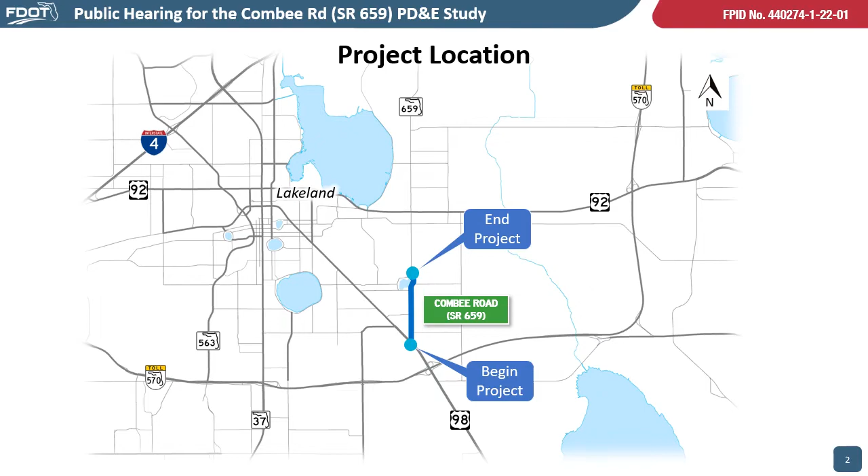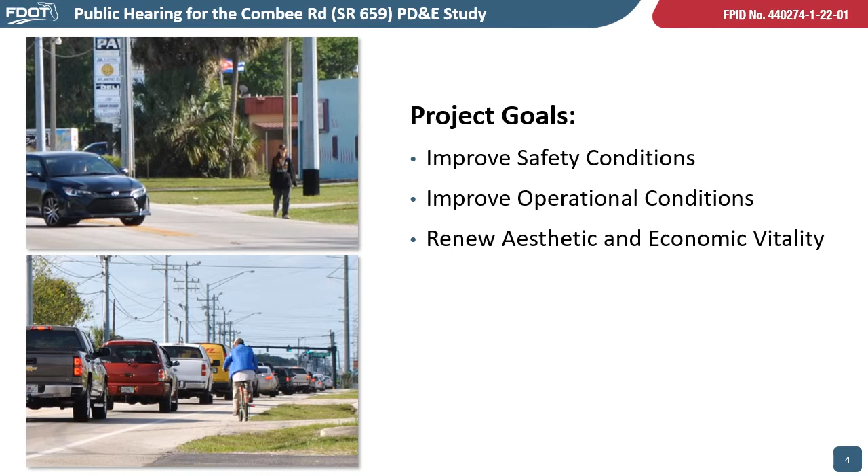The land use along Combee Road is a mix of suburban residential and suburban commercial. People have been observed walking and biking between the adjacent neighborhoods, the shops, and nearby schools. The project goals of this study are to improve safety and operational conditions, renew aesthetic and economic vitality, and enhance multimodal access along Combee Road for all users, including pedestrians, bicyclists, and transit riders.

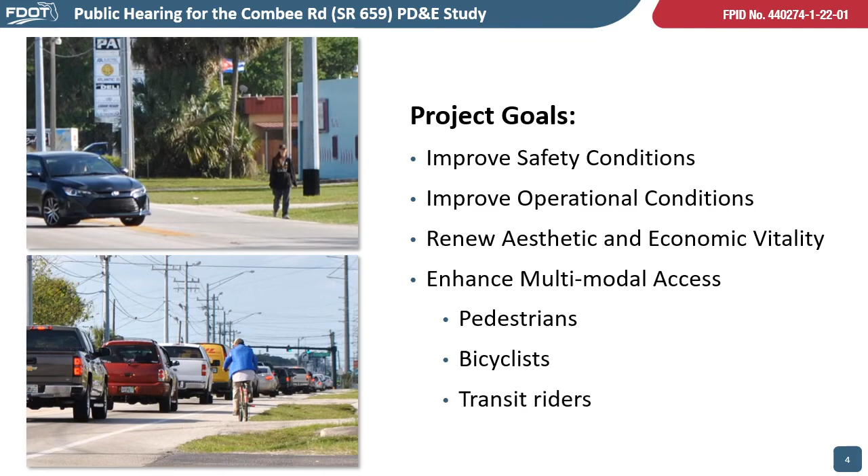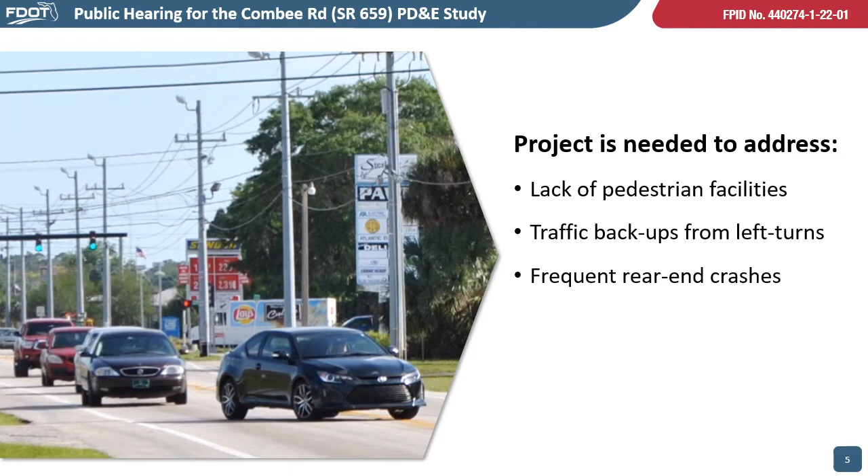The need for the proposed improvements for Combee Road is indicated by a lack of pedestrian facilities, frequent traffic backups as vehicles stop on the road to make a left turn, frequent rear-end crashes, and crashes at signalized intersections.

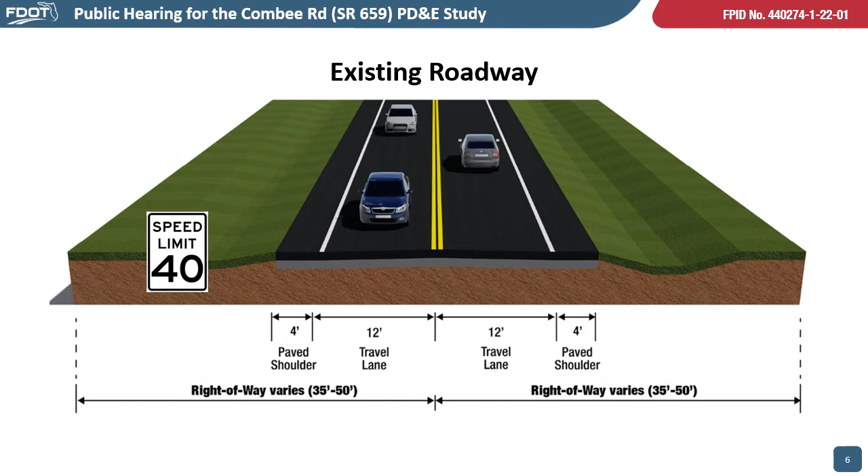Within the project limits, Combee Road is a two-lane road with one lane in each direction. There are paved shoulders but little to no sidewalks. The speed limit is 40 miles per hour. Stormwater runoff is collected in shallow roadside ditches.

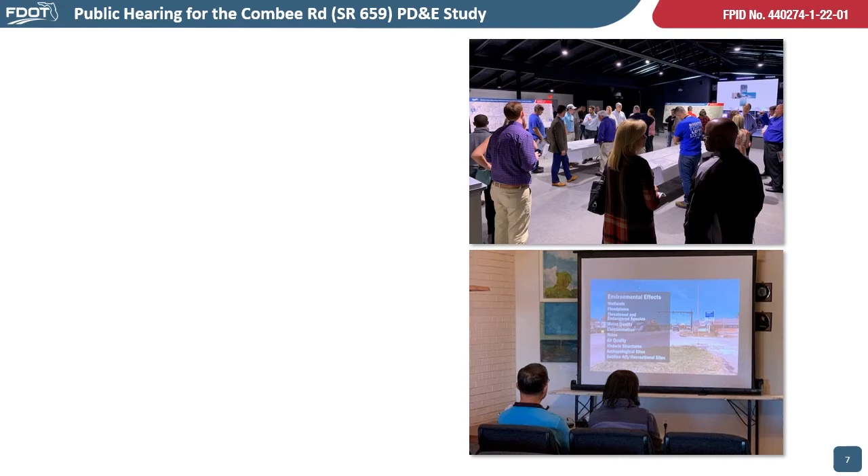Throughout this PD&E study process, FDOT has looked at many different concepts to enhance safety and multimodal access along Combee Road. In August 2018, FDOT conducted a public kickoff meeting. At the Alternatives public meeting on March 7, 2019, and the virtual public workshop from November 12, 2020 through December 3, 2020, we asked for your input on proposed improvements to Combee Road.

Based on your comments and additional environmental and engineering analysis, a preferred alternative was selected for Combee Road. The preferred alternative for Combee Road includes a 13-foot wide two-way left turn lane, one 12-foot wide travel lane in each direction, and an 8-foot wide sidewalk on both sides.

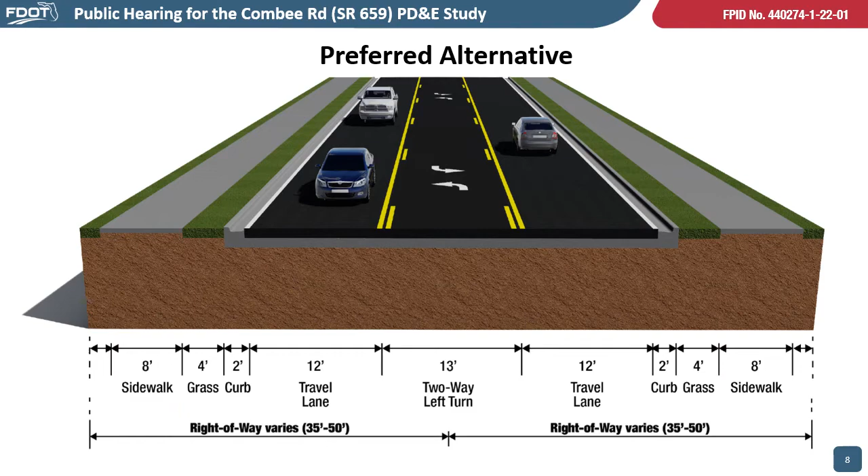Curb and gutter would be added to collect and redirect stormwater to off-site ponds for treatment. The preferred alternative includes single-lane roundabouts at Main Avenue and Skyview Drive.

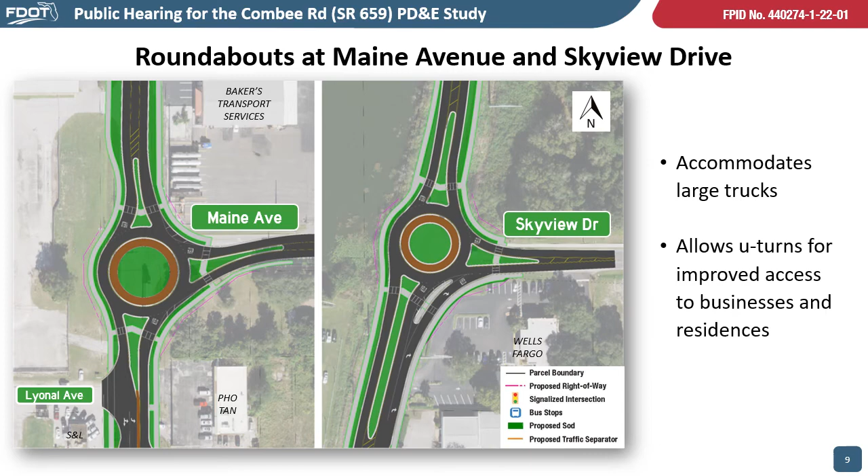Roundabouts have been shown to have safety and traffic benefits for all roadway users and can accommodate buses and large trucks. At these locations, the roundabouts are anticipated to have fewer crashes and would allow U-turns for better access to businesses and residences. At the remaining intersections of US 98, Commerce Point Drive, and South Crystal Lake Drive, traffic separators would be added to reduce crashes and improve safety.

Proposed locations are shown on the screen and on the display boards.

One intersection with a high number of crashes is Industrial Park Drive. A contributing factor to this issue is vehicles making a left turn out of Industrial Park Drive while unable to see approaching traffic. Multiple options were evaluated, including combining the signal at South Crystal Lake Drive with Industrial Park Drive. However, the analysis shows that this option would result in excessive traffic delays and safety issues.

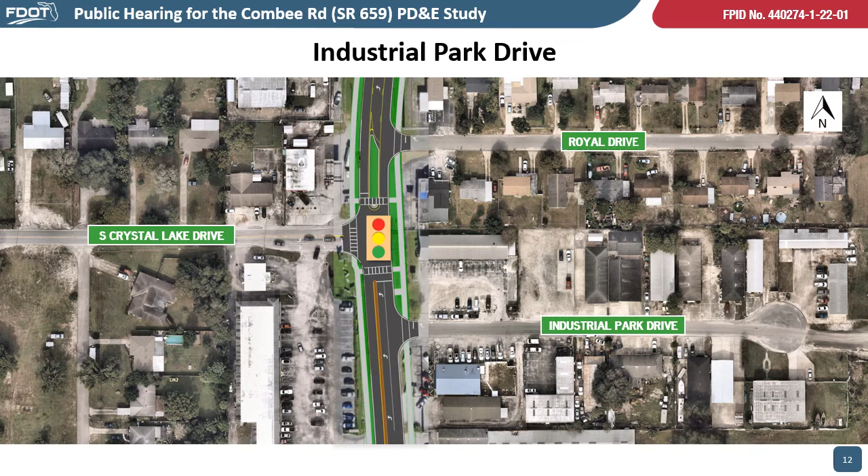To improve safety at this location, FDOT is proposing to add a traffic separator at South Crystal Lake Drive, which would make Industrial Park Drive right in, right out only.

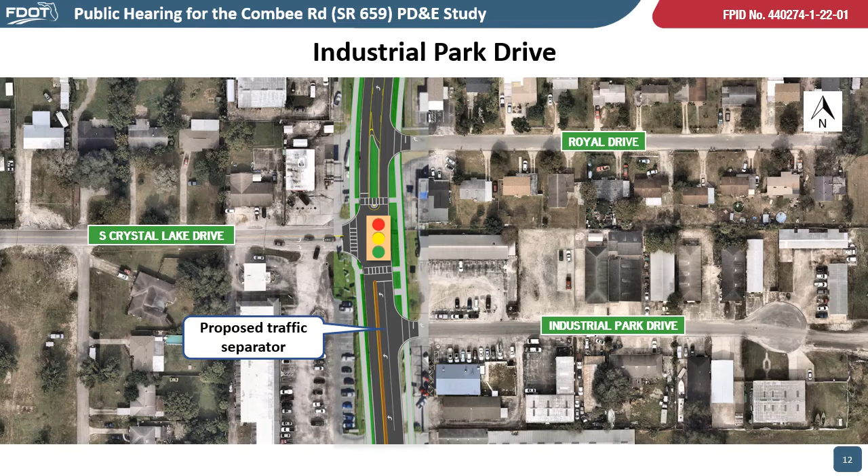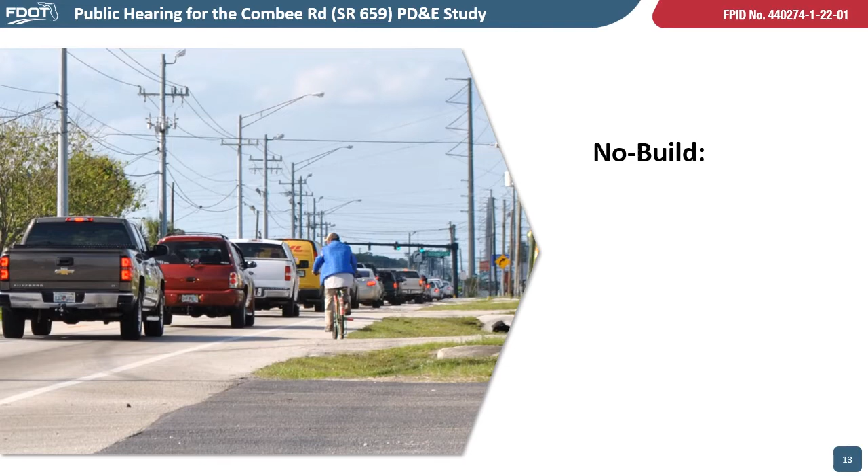Throughout this study, a no-build alternative is also considered. The no-build alternative assumes that no improvements are made to Combee Road through the year 2045, except for routine maintenance. There are advantages and disadvantages to the no-build alternative.

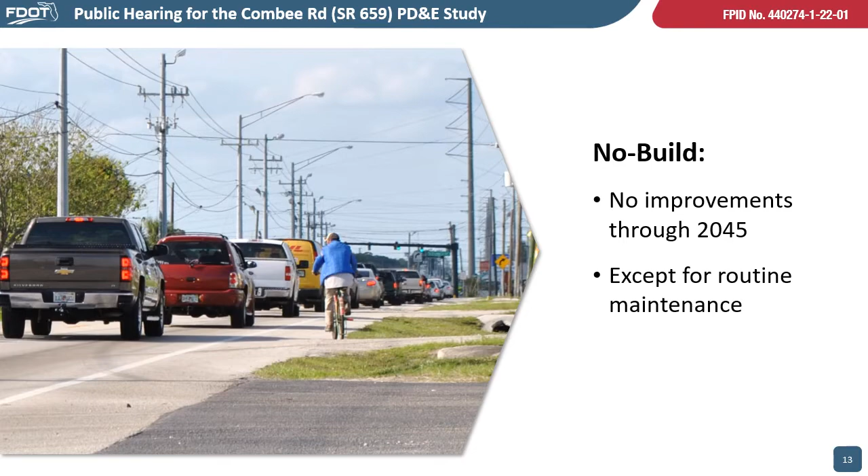Advantages of the no-build alternative include no impact to adjacent social, cultural, natural, or physical environments, no utility impacts, no expenditure of funds for right-of-way acquisition or construction.

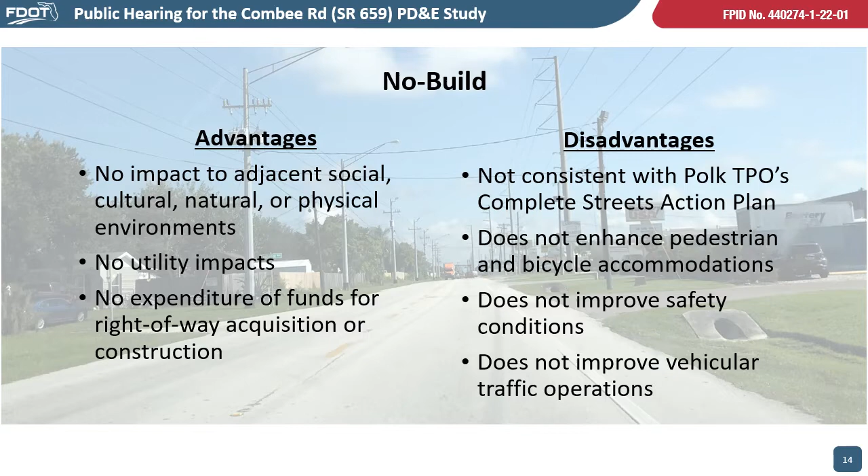Disadvantages include not consistent with Polk Transportation Planning Organization's Complete Streets Action Plan, does not enhance pedestrian and bicycle accommodations, does not improve safety conditions, does not improve vehicular traffic operations. The no-build alternative remains a valid option and will continue to be evaluated until the completion of this study.

FDOT evaluated environmental and socioeconomic factors relating to the proposed improvements in accordance with the National Environmental Policy Act of 1969 as amended, and other federal requirements.

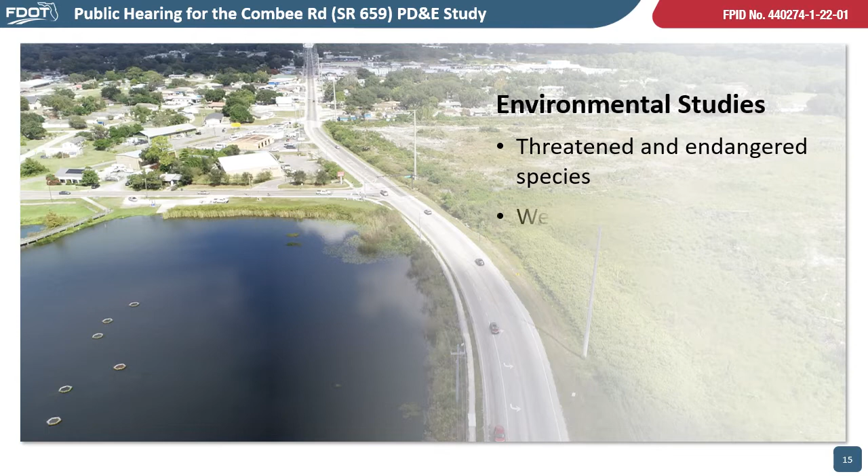The evaluation considered the effects of the Combee Road improvements on threatened and endangered species, wetlands and floodplains, water quality, stormwater management and permitting, potential contamination, cultural and historic resources, right-of-way requirements, and relocations. Please refer to your handout and display boards for more details on these items.

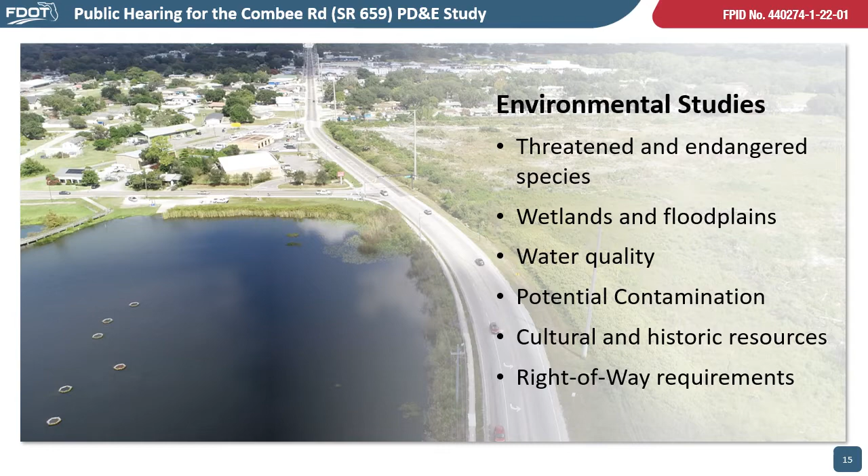Threatened and endangered species are allowed special protection under the Endangered Species Act of 1973 as amended and Florida statutes. FDOT assessed species within the project limits and through ongoing coordination with the U.S. Fish and Wildlife Service has determined that the proposed project may affect, but is not likely to adversely affect, the existence of certain federally listed, threatened, or endangered species.

The animal species include the eastern indigo snake and wood stork. Coordination with the U.S. Fish and Wildlife Service regarding the final status of these species is ongoing. If the preferred alternative is approved by the Office of Environmental Management, FDOT District 1 will continue to work closely with environmental agencies in future phases of the improvements to meet all environmental permitting requirements.

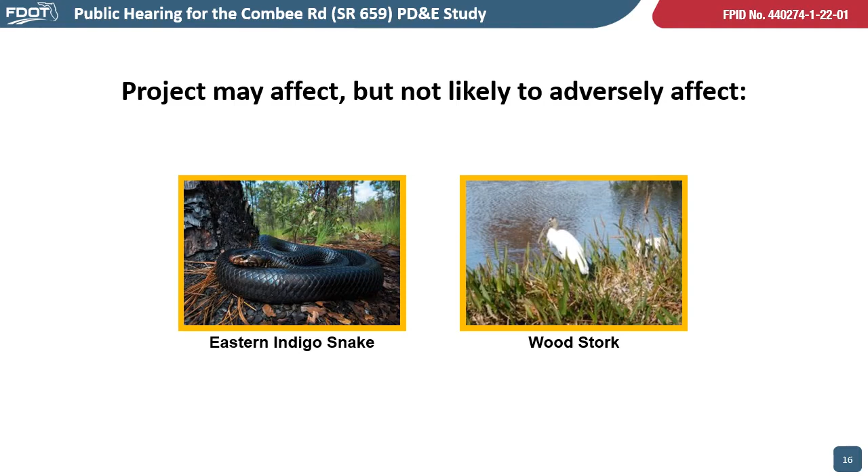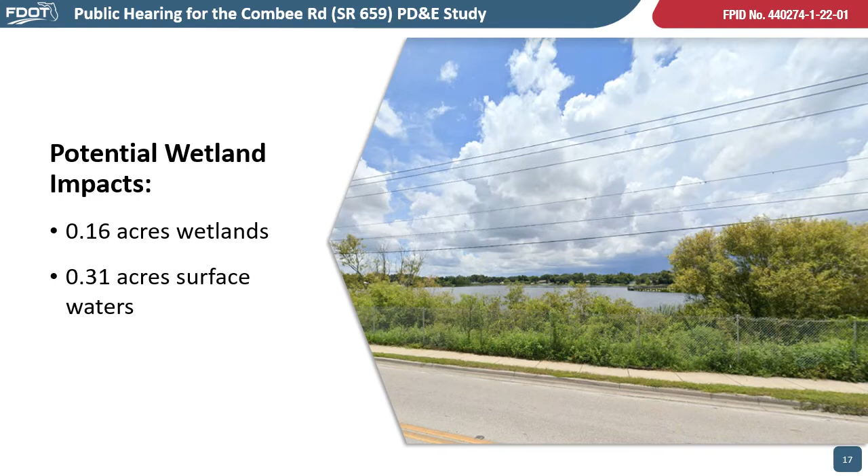FDOT evaluated wetlands within the project limits in accordance with Executive Order 11990, Protection of Wetlands. The proposed improvements will affect approximately 0.16 acres of wetlands and 0.31 acres of surface waters. The impacted wetlands are located within or adjacent to the existing roadway right-of-way and were previously disturbed by agricultural and residential development, roadway construction, maintenance activities, and the invasion of nuisance and exotic species. The Department will mitigate wetland impacts resulting from this project's construction.

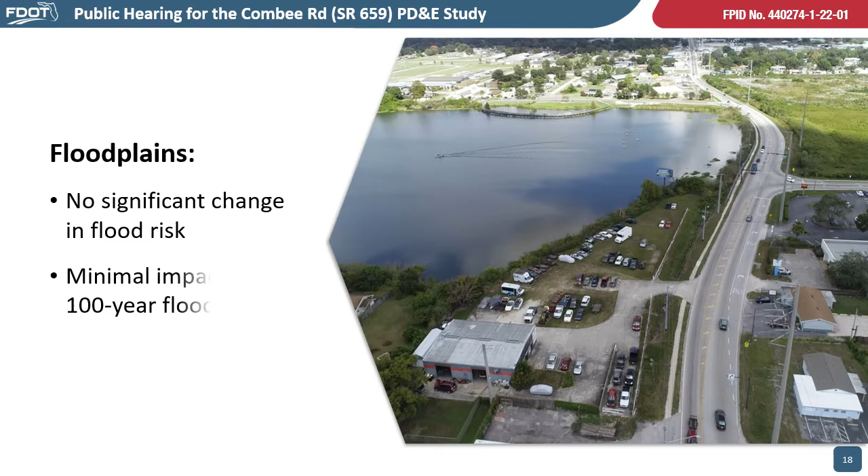The project has been evaluated for potential floodplain involvement in accordance with Executive Order 11988, Floodplain Management. There is no significant change in flood risk as a result of the proposed widening, and minimal impacts are expected to the 100-year floodplain.

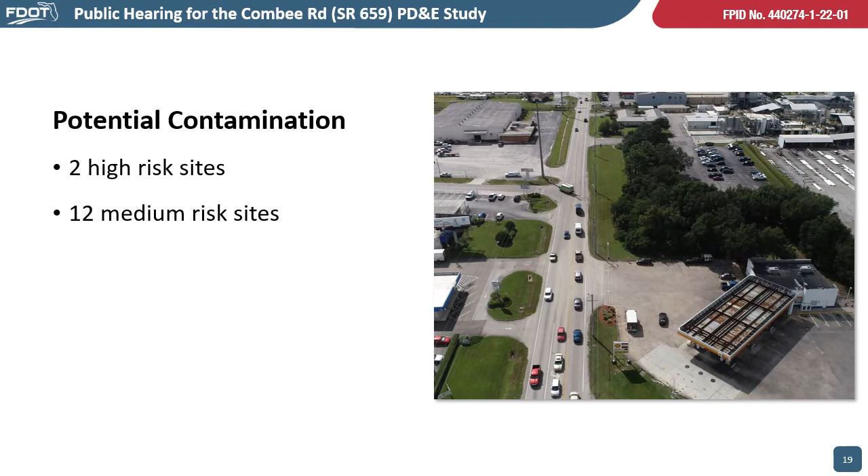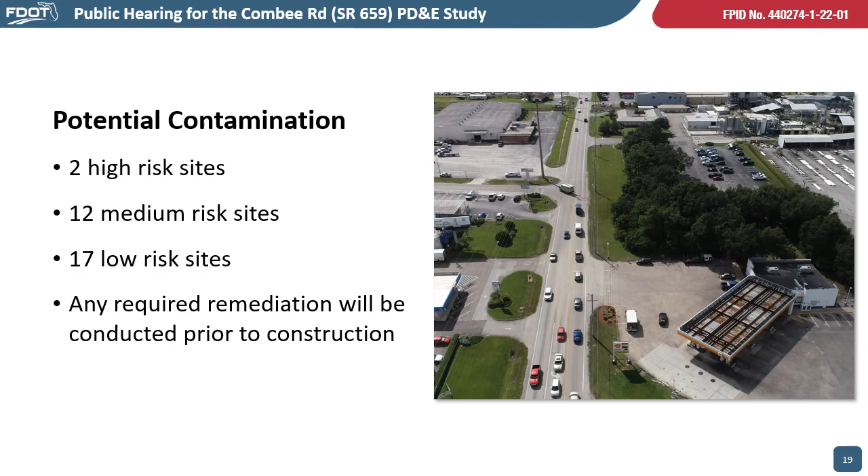Results of the environmental contamination screening showed that a total of 31 potentially contaminated and or known to be contaminated sites were identified within 500 feet of the project corridor, with risk evaluation ratings ranging from low to high risk. 2 sites were ranked high for potential contamination. 12 sites were ranked medium, and 17 sites were ranked low. For sites ranked low, no further action is required at this time. For sites with a risk ranking of high or medium, the FDOT project manager and the District Contamination Impact Coordinator will coordinate on further actions during the design phase that must be taken to address contamination issues. Before construction, specially trained crews will address contamination in these areas as required. Locations of these sites are shown in the concept plans.

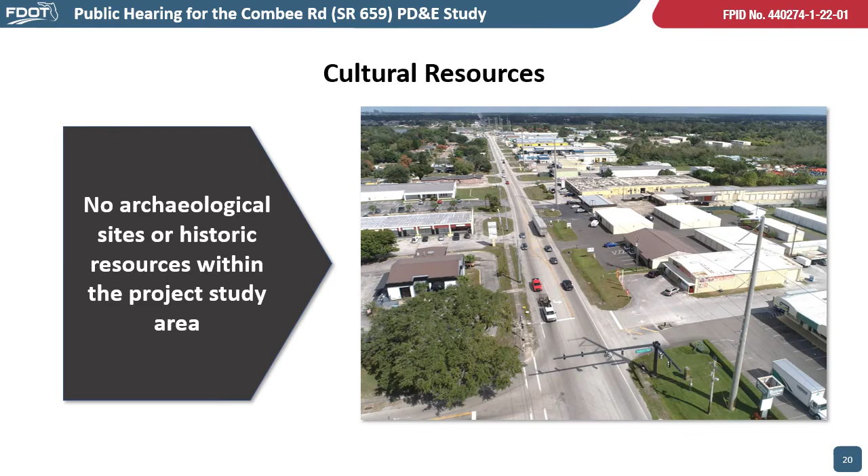The Cultural Resource Assessment Survey was conducted in accordance with the National Historic Preservation Act of 1966 and Florida statutes. Archaeologists and historians identified no archaeological sites or historic resources within the project study area. The State Historic Preservation Officer concurred with these findings.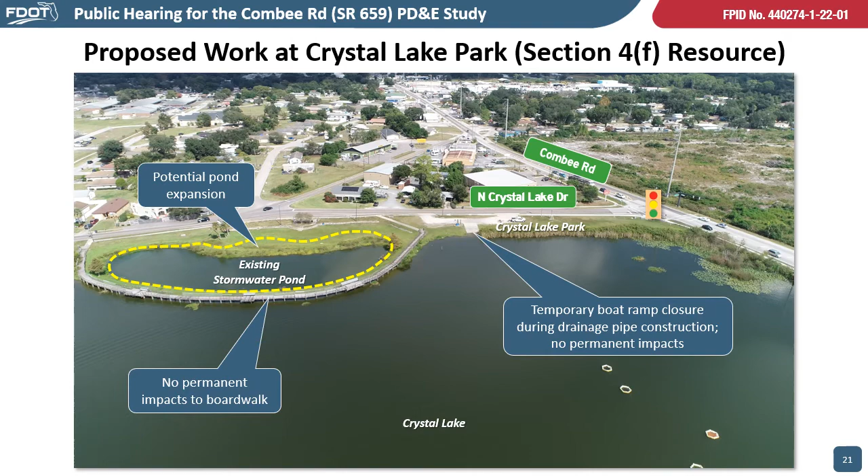The proposed pond improvements within the park will involve temporary closure of the boat ramp and boardwalk, but will not permanently impact these park features. Based upon the overall minor level of impact, FDOT is seeking a de minimis finding, which confirms that impacts to park activities, features, and attributes are minimal. This hearing provides the opportunity for public comment on this proposed finding.

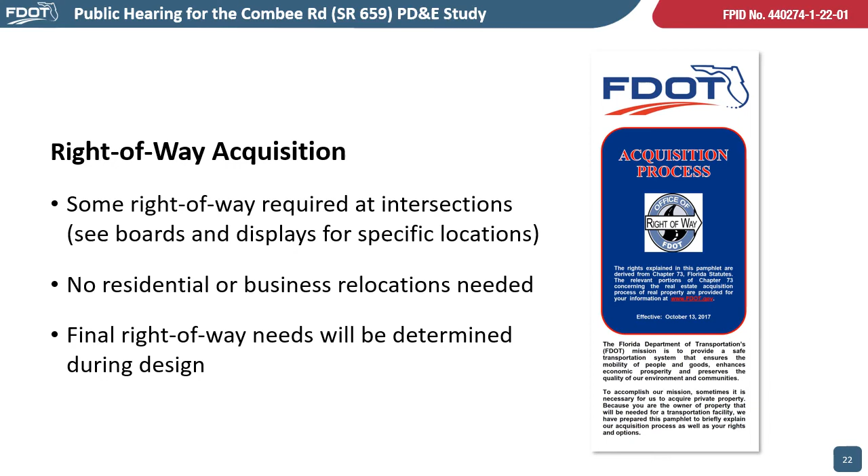This project would require FDOT to acquire right-of-way at the intersections. No residential or business relocations are proposed. All right-of-way acquisition will be conducted in accordance with Florida Statute 339.09 and the Federal Uniform Relocation Assistance and Real Property Acquisition Act of 1970, commonly known as the Uniform Act. The right-of-way specialists who are supervising this program are here tonight and will be happy to answer your questions.

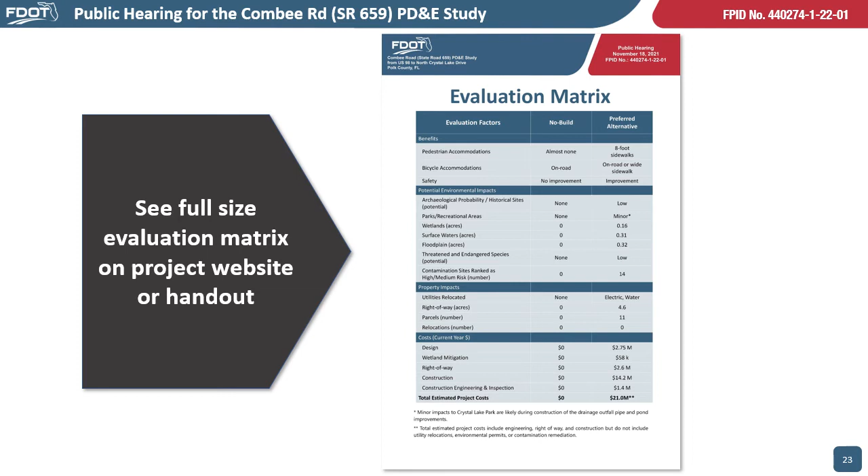An evaluation matrix has been provided in the display boards and handout. This matrix shows a detailed comparison of the preferred alternative and the no-build alternative, including potential effects to the social, cultural, natural, and physical environments. It also identifies preliminary costs. The department's preliminary estimate of total project cost is $21 million.

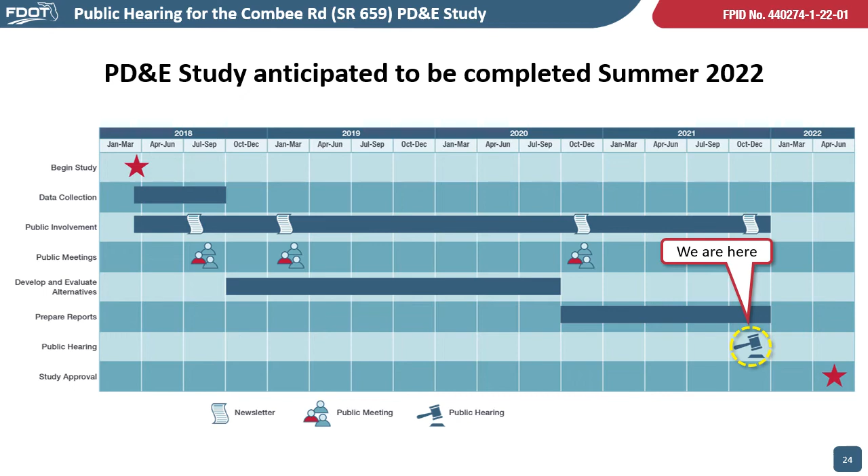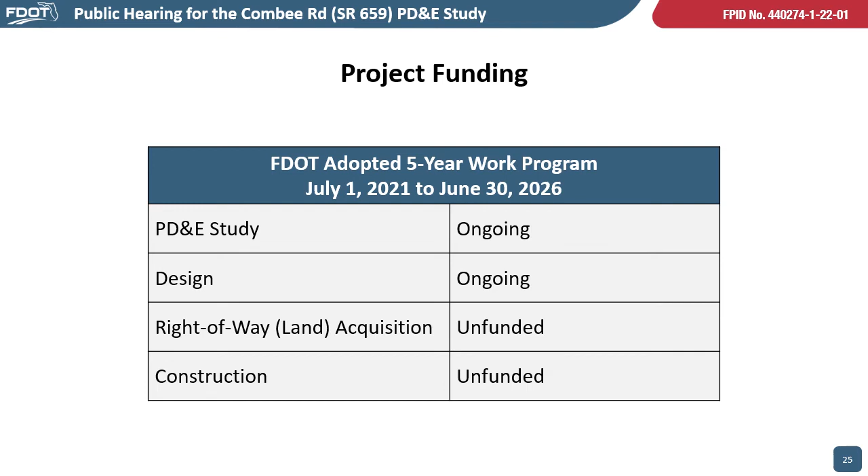The department anticipates completion of this PD&E study by early summer 2022. The detailed study schedule is available in the display documents and in the handout. At this time, FDOT's 5-year work program includes funding for this PD&E study and the ongoing design phase. Future phases such as right-of-way or construction are not currently funded.

The purpose of this PD&E study is to evaluate engineering and environmental data and document information that will aid FDOT District 1 and the FDOT Office of Environmental Management, or OEM, in determining the type, preliminary design, and location of the proposed improvements.

This hearing follows all federal and state rules and regulations. Please see the hearing display boards for specific information. The environmental review, consultation, and other actions required by applicable federal documents for this project are being or have been carried out by the Florida Department of Transportation, or FDOT, pursuant to 23 United States Code Section 327 and a Memorandum of Understanding dated December 14, 2016, and executed by the Federal Highway Administration and FDOT.